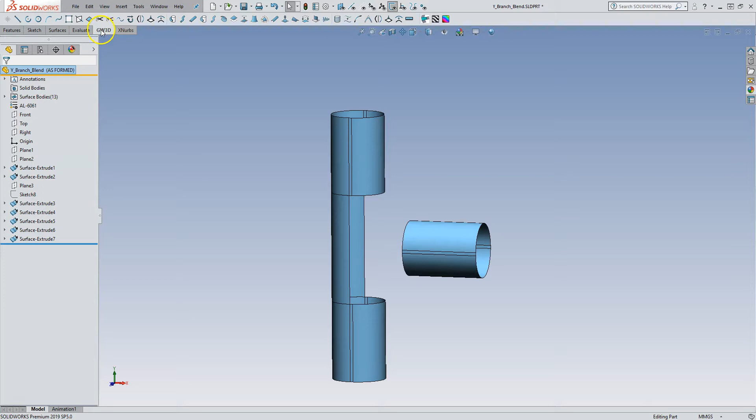I am going to use both GeometryWorks3D and XNurbs. I think you can probably do it with normal SolidWorks tools, it's just easier to get a good result with the help of GW3D and XNurbs. We can't use exactly the same workflow. If you haven't seen the Rhino video, check it out, because there we do blends and then match afterwards, and there is no equivalent to match surface in SolidWorks. So let's see how it goes.

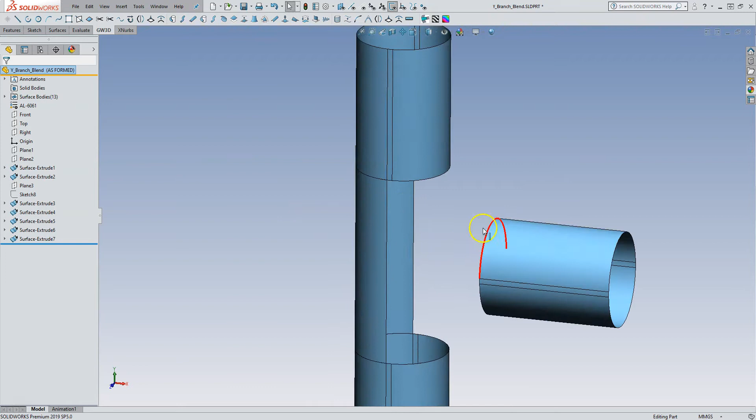The basic setup is the same, and I'm not going to go over how I modeled this. If you're looking into a blending video, you should be able to do a couple extrusions and splits and get to this point. So GeometryWorks3D has a blend surface very similar to the Rhino one.

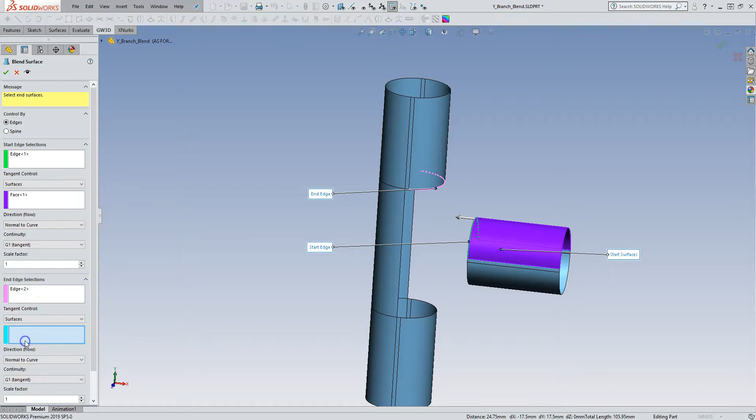So you pick an edge and then pick another edge, and then we're going to use surfaces for our tangency control. You have different options here, but because we have surfaces, we can use surfaces.

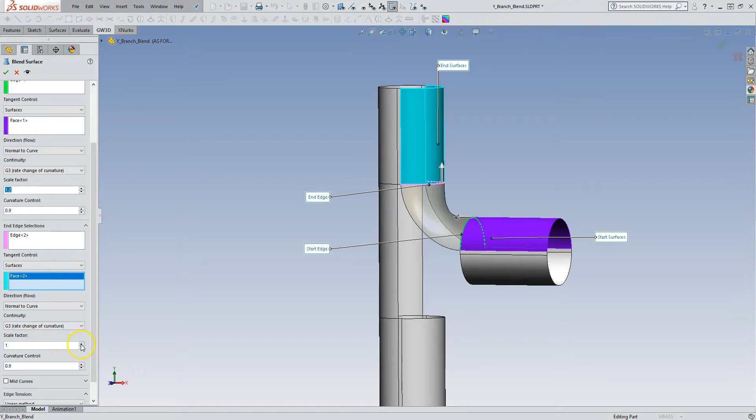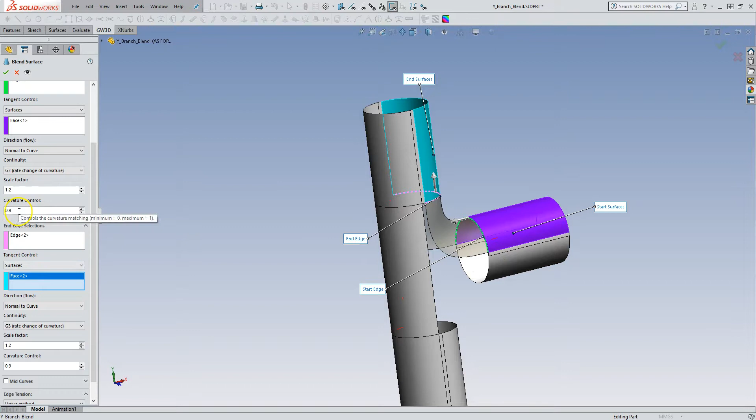Now, this is not the result that we're looking for, and I've found that in this case, G3, which is flow, giving you 3 control points that are aligned, is the best result, and I'm going to set the scale factor to 1.2. If we preview that, that gives me that smooth blend that stays relatively close to this center line. G3 1.2, I'm not changing the curvature control. You can change the acceleration of the control points coming out of the surface, but I'm going to leave that at default 0.9. So that's our first blend surface.

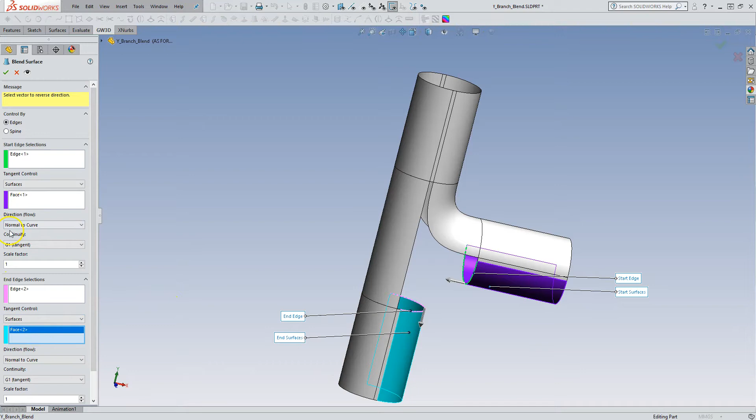Let's do another one. Select that edge, and then same thing, we're going to use surfaces for our tangency control. These guys, and we want to do the same thing: G3, 1.2, 1.2. This is basically to make sure that they're identical. I could have mirrored it over, but this is an easy way to do this.

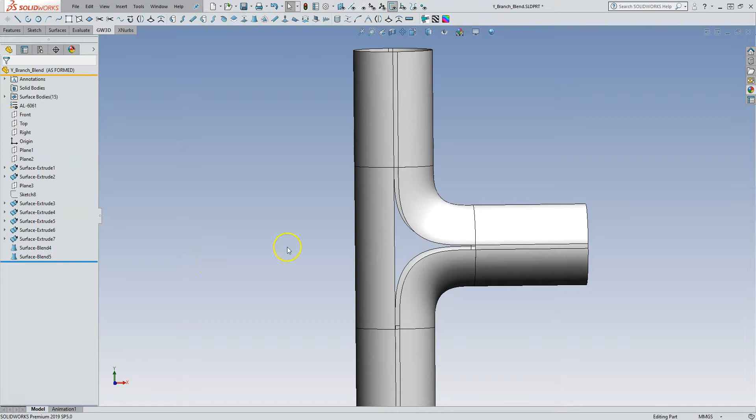So the next thing, I want to blend in between this surface and that surface, and I want to blend from the center of this guy and then find the theoretical intersection that gives me a natural blend. The easiest way, I think,

is in features, reference geometry, to add a couple points here, just evenly distributed. Another one over there, and that one's there. Turn on the points and add another one on this guy.

Okay, so now I have some points that I can reference, and then on the front plane, I'm going to make a sketch with some reference geometry. So I'm going to snap to that, I want that to be horizontal. Snap to that, I want that to be horizontal.

These guys I want to be equal, so that's going to give me that natural intersection of the theoretical sharp. Those I want perpendicular to the edge.

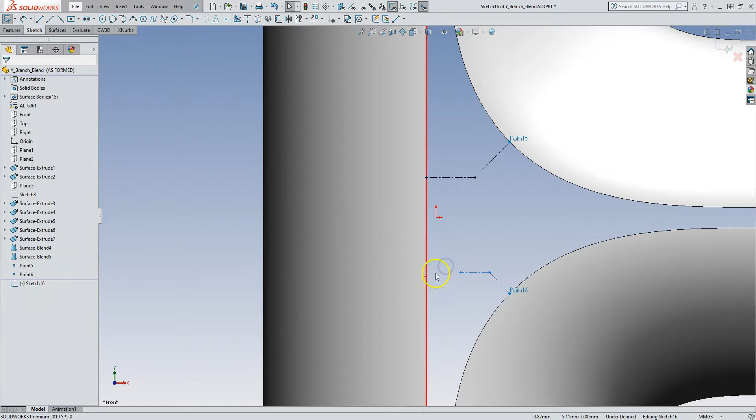It will allow me to select it. There we go, these we want coincident, and that should fully constrain these guys. Didn't do what I wanted to do. Coincident. So now this is fully constrained.

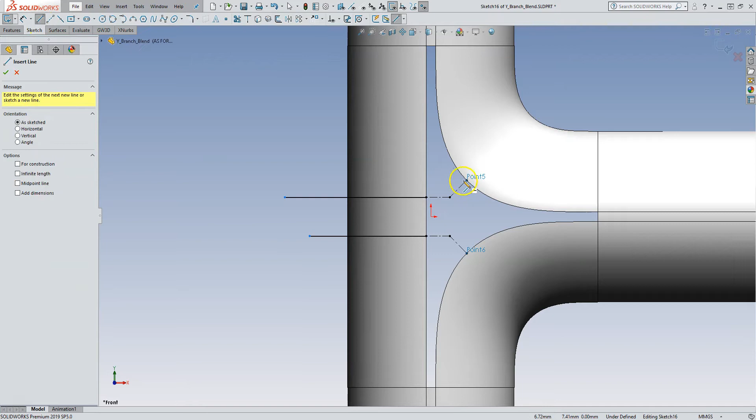I want to split these, and there are ways to bring back the splits, but I'm not going to worry about that for the video. This is just a quick and dirty way to get me where I want to go. So I'm going to leave these unconstrained, actually. It's not picking up that tangent. Doesn't matter.

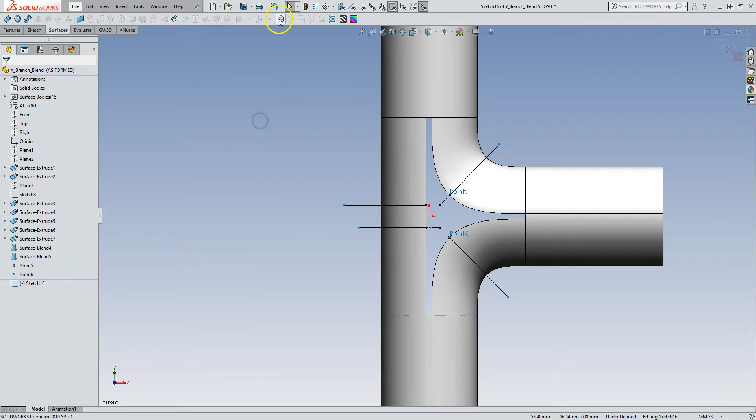Okay, so now with this sketch, I can split this guy and this guy, and that'll give me split edges, because there is no equivalent to split edge in SolidWorks. So surfaces, split, current sketch, this guy and this guy, okay? And we can get them back if we want to at a later point.

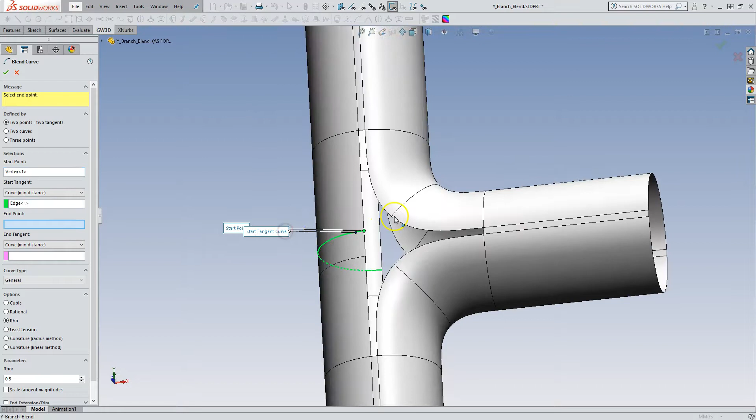But now I have this edge and this edge that will create a very natural blend between this edge and this edge. And we're going to create a couple curves. GeometryWorks3D has a huge amount of curve options, blend curve options. Since I've already played with this in preparation for the video, I found that in this case, a Rho blended curve gives me a really good result.

This is a conic, and I think one of the reasons this is a good result is because this is a circle, which is essentially a special case of a conic, and so you get this really smooth transition between the two guys.

So I'm going to accept that, turn on my curves so I can actually see them, and then we're going to do the same over here, from there to there, from there to there, and accept that Rho blend again, and a final one from there to there, and from there to there. That should put us in pretty good shape to blend this all together.

Now I'm going to use XNurbs to blend it together. And because these are circular surfaces, I'm just going to use tangency. If we use curvature, it's going to try to dip in, and we don't want that. So we're just going to use tangency at this edge, that edge, that edge.

Accept the preview, show preview, optimize for quad. Yes, that's what I want. I've played around with these settings, I go over that in some of my other videos, but after playing around and looking at the zebra stripes and the curvature, this gives me a pretty good result. So I'm just going to accept that for now for the sake of moving things along.

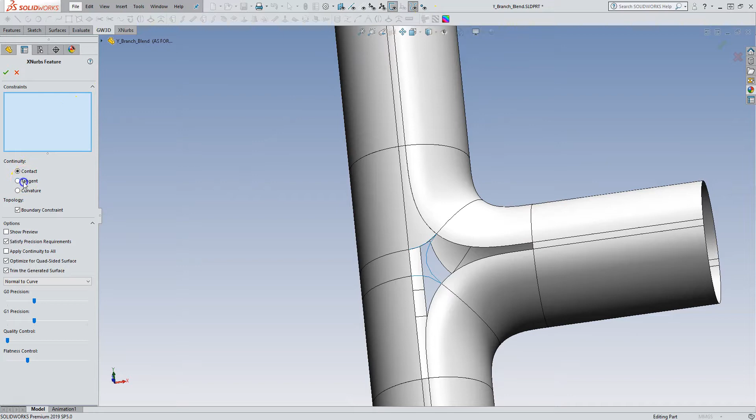I'm going to do the same over here, tangency for that guy, this guy, and that guy. That automatically defaults to contact because it's obviously a curve. Those are tangent, accept that.

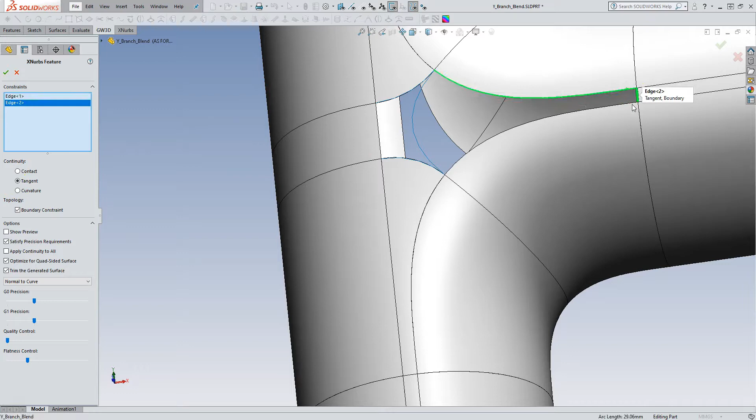This guy, that guy, that guy, and that guy, okay? And as with the Rhino, you'd never want to patch over something like this. This would lead to a whole bunch of control points being bunched up in this area, and you'll never get good curvature continuity through here.

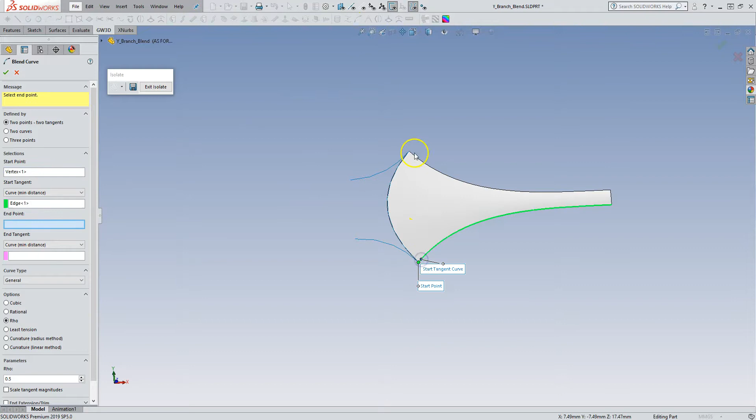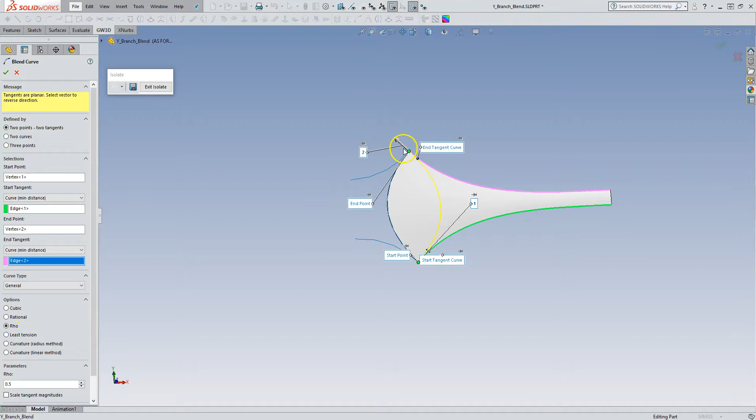So instead, we're going to create another blend curve from there to there, from there to there. And with this, we're going to use least tension. Actually, I think we can do Rho. Let's try Rho. Sometimes if you don't have the right settings, you'll cut off some of this edge and you won't be able to blend. I think when I tried previously, I tried least tension, but I actually think the Rho option should work as well. Let's just see. If not, we can go back and change it.

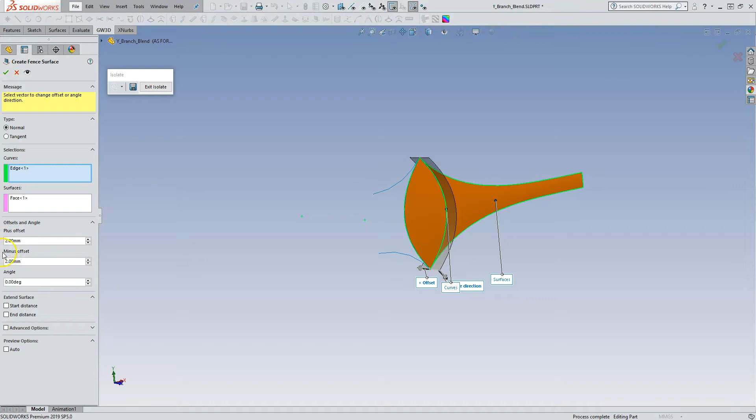Now I'm going to create a fence surface, another GeometryWorks3D feature. You basically select a curve and a face, then select either normal or tangent, and offset in one direction or two directions, and it basically creates a cut surface so that we can trim this back. Surfaces, trim surface, we're going to go with this guy. Keep selections is fine, that's the one we want to keep. Turn off my curves, hide that, exit isolate.

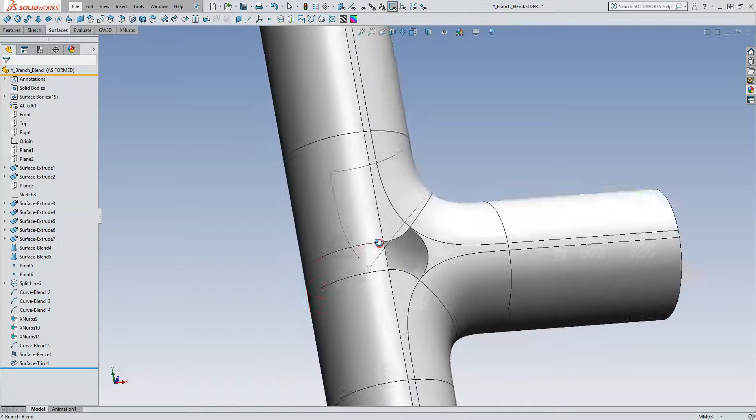So now we're set up to do this final blend. I'm going to use XNurbs for this because I think it creates by far the best surface. You can do this with the boundary feature or surface fill or whatever you have available. You can apply this technique, the blending and trimming, with standard SolidWorks features. I just find it easier and faster, and I get better results with the help of GeometryWorks3D and XNurbs. So for this final one, we're going to use XNurbs as well.

So tangent, this is an arc profile. This is not an arc profile, it's basically a straight edge, and we want to just have one control point matching up. So we're going to go tangent to this, because in essence we have a straight line going through here, and with curvature it's going to dip in, and we don't want that. So we're going to do tangency, and then these we want curvature. I'm going to bump that up to curvature, and I'm going to bump that up to curvature as well. Just double checking that I have everything right: edge 1 tangent, edge 2 tangent, edge 3 curvature, edge 4 curvature, show preview.

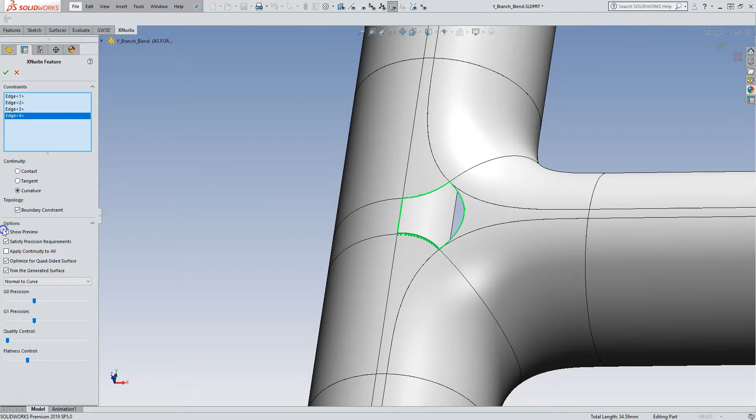There's my preview, and you can already see that I've got this nice flow in this direction, nice flow in this direction, and this looks pretty clean. I'm going to accept the same settings, hit accept. And so now we have this created this nice blend in between.

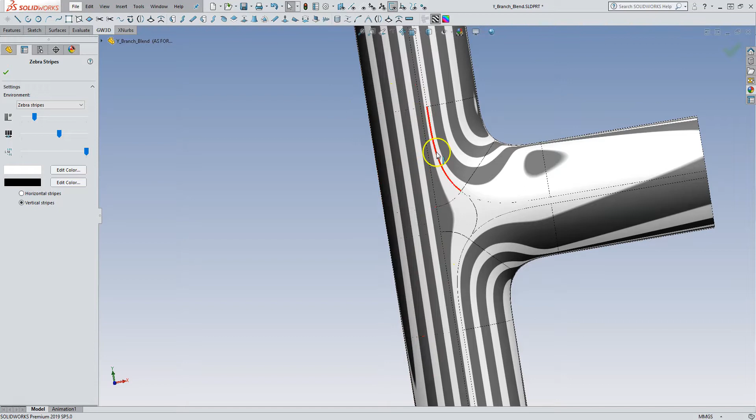We have a really natural blend here, and if we turn on the zebra stripes, the main thing I'm trying to achieve is that you have this straight round surface, and I want this to flow into the other blend, and I've achieved that. If you follow this highlight, you'll see it perfectly following the circle here, then it starts to bow out and gets accelerated as it approaches this, then blends into that center line, and we have nice curvature through here as well.

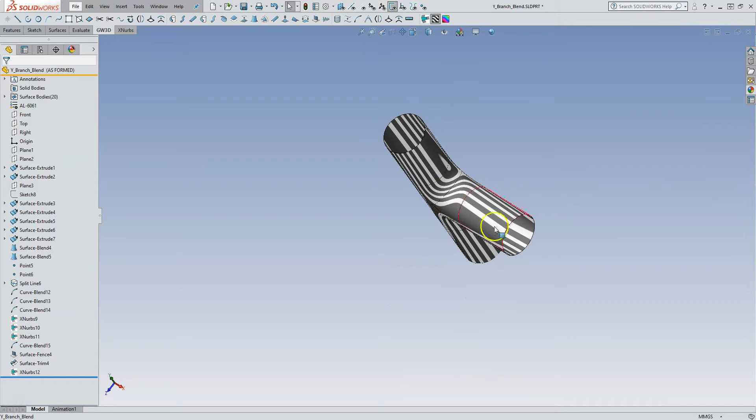Now the one thing, this was a quick and dirty, obviously. I lost my color, I don't know what happened there. Let's get that back, I like modeling in this blue color.

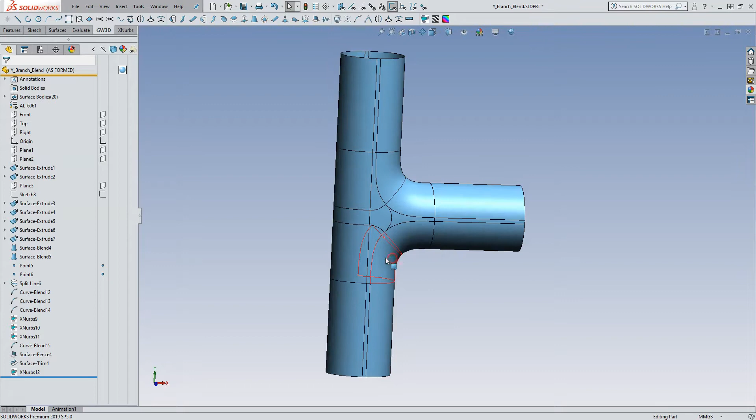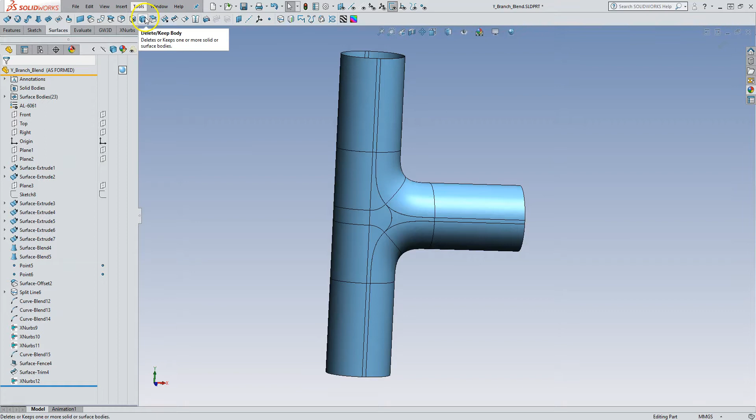If you wanted these to be not split just for sake of cleanliness, you can go back to before you split, and then we can say offset surface 0. Offset these guys. So now I've offset them before the split feature, so let's hide them. Then we roll back to our blend, and now I can go in and say I want to get rid of these guys.

And then show my offset. I didn't model the other side. If I mirror this over, we should be able to knit this together and create a solid out of that. Actually, I haven't tried that with the previous version either, so let's see if that works. Mirror face is going to be front, I want to mirror bodies. This guy, that guy, that guy, and that guy. Yep. Okay, surfaces, knit surface.

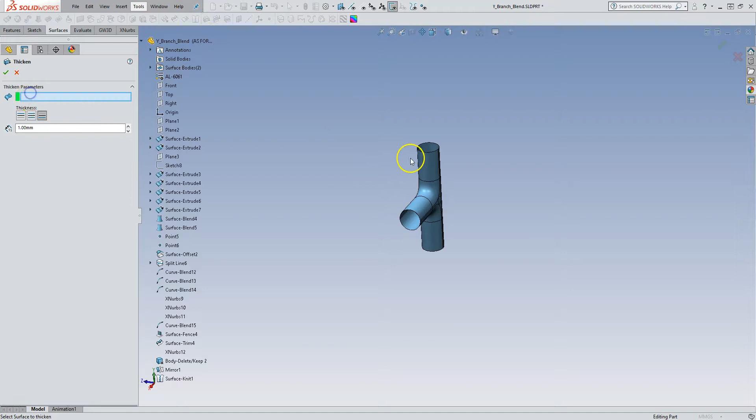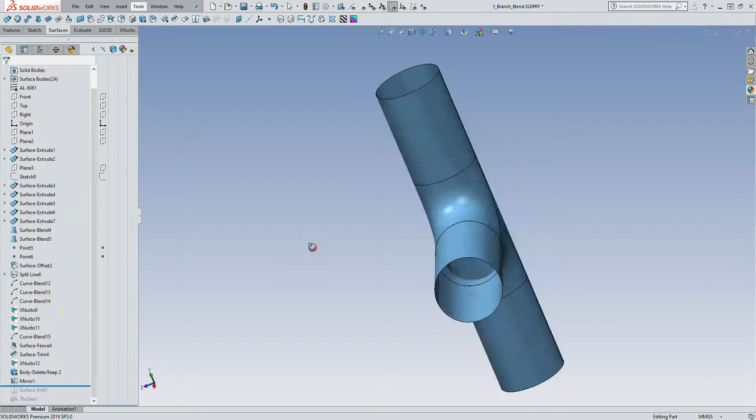And so now we should be able to thicken that guy up into that direction. Let's do 2 millimeters, and we have a solid. Oh, it's funny, it actually knitted all of it together, because these guys were... that's actually a really interesting result, it merged the surfaces that were split before. Let me roll that back. So these guys were all merged together. Wasn't expecting that result because I hadn't tried it before, but there you have it.